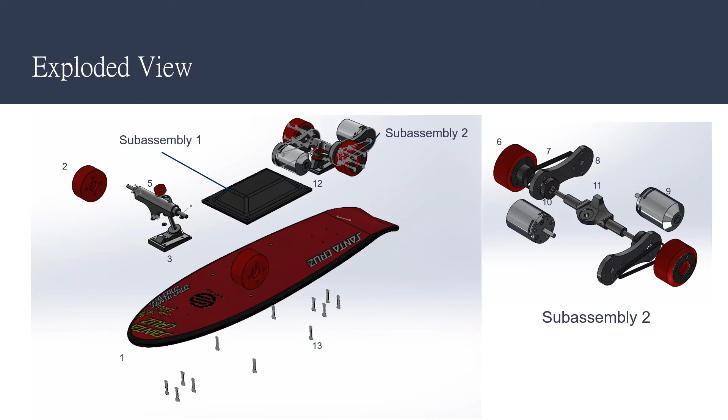As shown in the FAST diagram, the electric skateboard's task function is to transport the user, with two branching basic functions: control speed and control direction. Each basic function is then divided into two supporting functions. In order to control speed, the electric skateboard must be able to increase and decrease velocity.

And in order to control the direction, the skateboard must allow the user to distribute weight while providing enough grip to maintain balance. Other supporting functions include assure dependability, assure convenience, enhance product, and please senses. Assure convenience is further branched into two functions: ensure portability and reduce travel time.

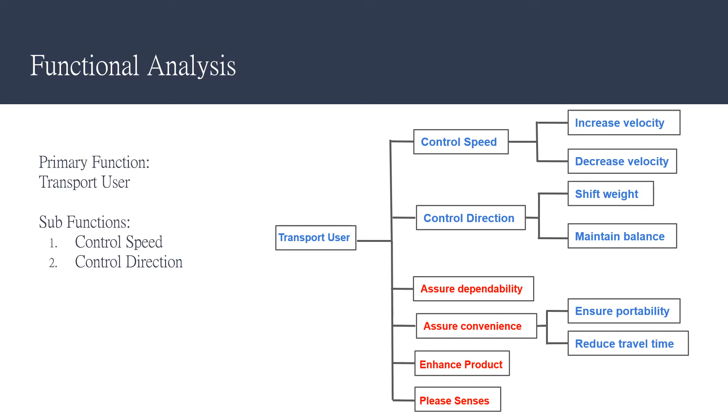The diagram below shows the first possible assembly sequence of the electric skateboard. The sequence includes two subassemblies: the drivetrain system and the power system. The assembly begins with the deck and connects each subassembly once they are completed.

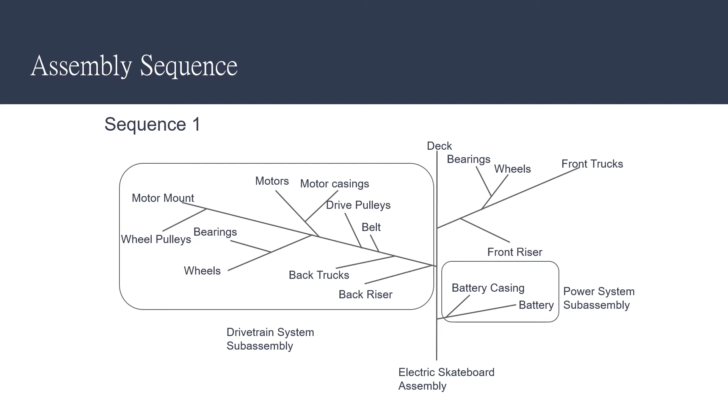This is the second possible assembly sequence. While this sequence also begins with the deck, the order of the trucks and risers has been moved forward in the process. This reduces the complexity and facilitates the drivetrain system subassembly.

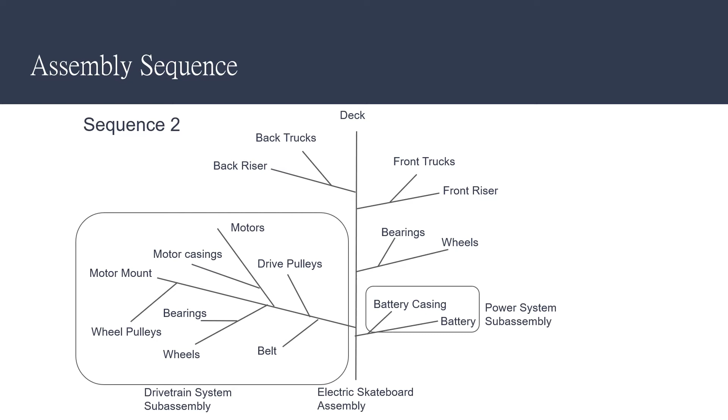This is the function component mapping matrix for our electric skateboard, which shows which parts correlate to which functions. The front and back risers will help the customer shift weight without the deck of the board hitting the wheels. They should also not be too large in order to keep the board height small to ensure portability.

The trucks will affect the skateboard's ability to turn, shift weight, and the balance of the user. The wheels will help the user maintain balance depending on their size, which will also affect portability because we want the board to be relatively small. Wheels also help the board go fast and thus reduce travel time.

The bearings will ensure that the wheels and trucks are secure and won't wobble, making sure the user maintains balance. The motor and the pulleys of the board all have a role in powering the skateboard, which means controlling speed and increasing and decreasing velocity are affected. Because they power the board to go fast, they also help reduce travel time for the user. The motor must also be small to ensure portability.

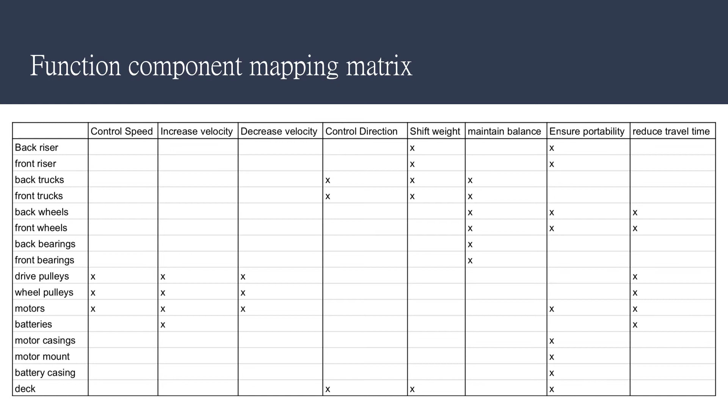The batteries of the board will power the motor to increase velocity of the board, which helps reduce travel time. The motor casing mount and the battery casing will keep the motor and battery compact to ensure portability. And the deck will allow the user to control direction and shift their weight. And the size of the deck will also affect the portability of the skateboard.

The bill of materials for the electric skateboard has a total of 16 parts, divided into 2 subcategories or assemblies based off of their functions: motor and drivetrain related components and non-motorized components. This separation also helps to distinguish them between the stock skateboard pieces that are ready to buy and the more custom redesigned components.

The main materials used in our product are plywood for the deck, ABS plastic for the base plates, plain carbon steel for the tougher components, and polyurethane for the wheels. Plain carbon steel and polyurethane are somewhat standard materials for skateboards, each providing the proper amount of rigidity and durability for their respective components. We chose ABS plastic for the base plates since ABS is relatively cheap and still holds up well against small potential damages.

The parts listed in the bill of materials use a variety of manufacturing techniques. These include injection molding for the ABS pieces, die casting for some steel parts, and CNC machining for the geometrically simple steel parts, such as the motor mount and clamp. The rest of the parts, such as the motors, fasteners, and the wheels, can be made to order.

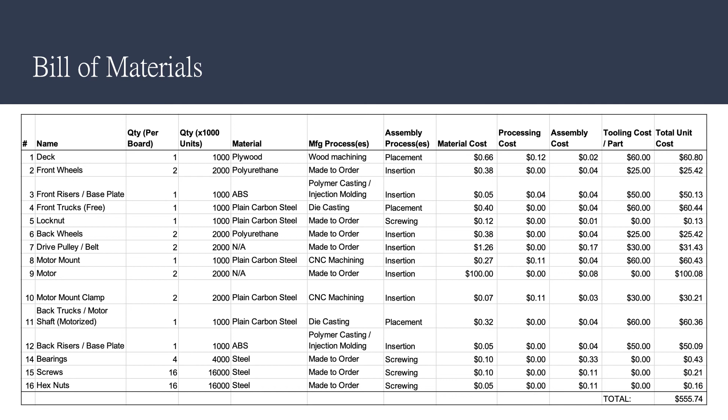Formulas learned from lecture were used to calculate material, processing, assembling, and tooling costs. For material costs, reasonable engineering judgment was used to estimate the scrap mass created by each part. For the component masses, we were able to pull directly from our full CAD model of the skateboard. For processing and assembly costs, we made a few simplifying assumptions, such as the US labor rate and average cost of CNC machines. Ultimately, we were able to reach a rough total estimate, with big headroom for improvement, at $555 for production costs for the entire electric-powered longboard.

Here we have 2 tables for the product family design. The top table divides all the functions into 2 groups: functions that will be the same for both customer groups and functions that will be different for each customer group. Looking at what will be the same for both groups, we don't want any customers falling off the board and getting hurt, so maintaining balance is a function of the board that should be the same for both. We also have the goal that the skateboard should be good for packing or taking places, and helpful for getting from place to place quickly. This is why ensuring portability and reducing travel time are the same for both groups.

Skateboard hobbyists may want a more extreme board than commuters. This is why control direction, control speed, and increase and decrease velocity will be different functions for both groups. The bottom table classifies parts that will be the same for both customer groups, called the platforms, and different for both groups, known as the modules. Because the skateboard hobbyists are going to be using the board in more extreme ways, they will need different types of motors, wheels, deck, and trucks to enable them to go faster and make better turns and have a different feel of the board. The parts in the platforms column will be the same for each board.

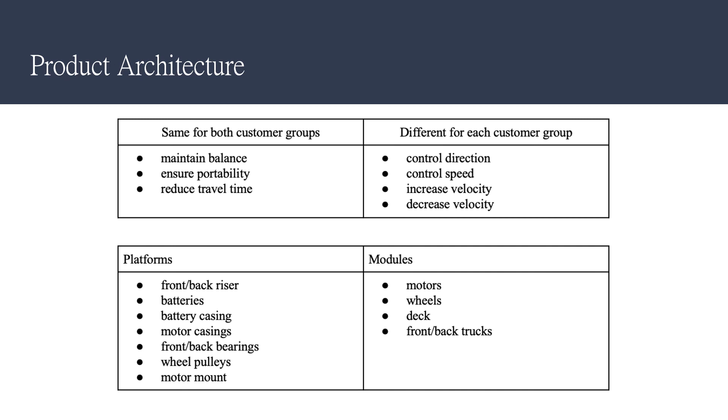We redesigned the skateboard for different customers. We made a deck, wheels, trucks, and motors as a module so it can fit different customers' needs. First, because our primary customers are hobbyists, they need a short and narrow deck to get more flexibility when they want to do stunt performance. And shorter trucks also give the same benefits. And a more powerful motor lets hobbyists have a faster acceleration to get better performance if they need.

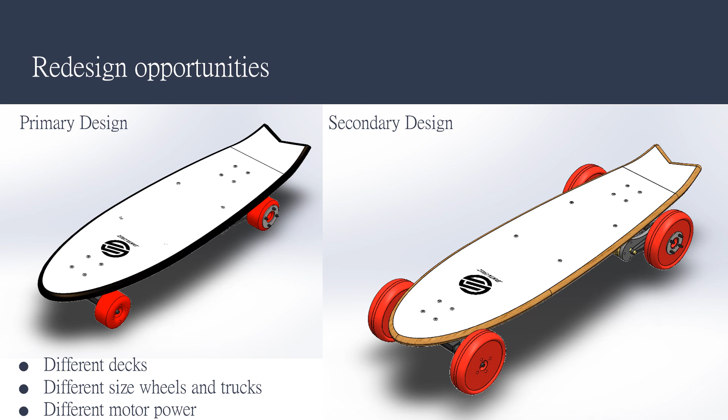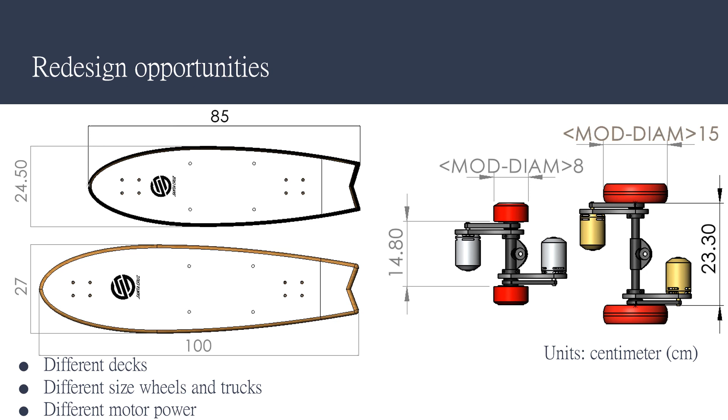For our secondary customers, because they commute to work or school daily, bigger wheels can provide better cushioning to avoid dangers caused by pits or ups and downs on the road. And wider boards and trucks also have more stability. Because it is used for general commuting, it does not require a powerful motor. It is sufficient to use a general motor and can also reduce the price. Here we show the dimensions of the redesigned parts. For secondary customers, a wider truck and wider deck, and larger wheel size. This is a brief introduction to the redesign.